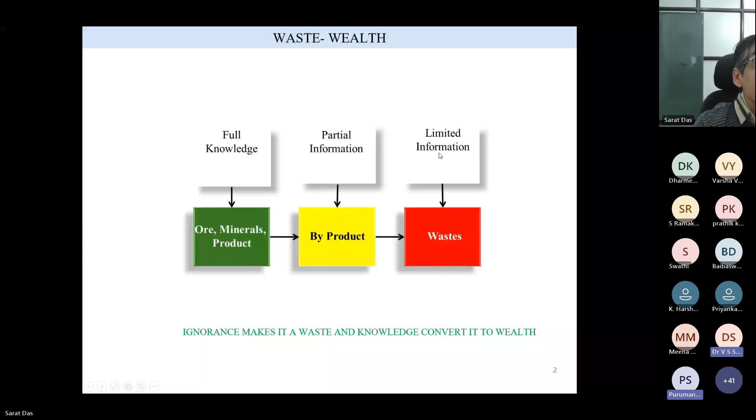Another one: sustainable development goals. Nowadays hope most of you know about these sustainable goals. There are altogether 17 sustainable goals in three domains. When I'm talking about these three domains, we are talking about economy, society, and biosphere, or in terms of people, profit, and planet.

The sustainability word was there, but initially they were thinking only about the planet - that is the environmental aspect, this will happen, that will happen and so on. Then over the years in the 80s, people added how it affects people, how it is affecting society. Later, only in the 90s, profit was added, that economic part was added.

So sustainability consists of three parts: economy, society, and environment, or people, profit, and planet. Accordingly, if you say people, it is poverty, peace, justice - all these are under society or people aspects. When talking about economy, you can see different aspects. Accordingly I've given the color coding. Finally 17 is the collaboration - all three are collaborated, which is called the 17th goal. Otherwise all 16 are related to either profit, people, or planet.

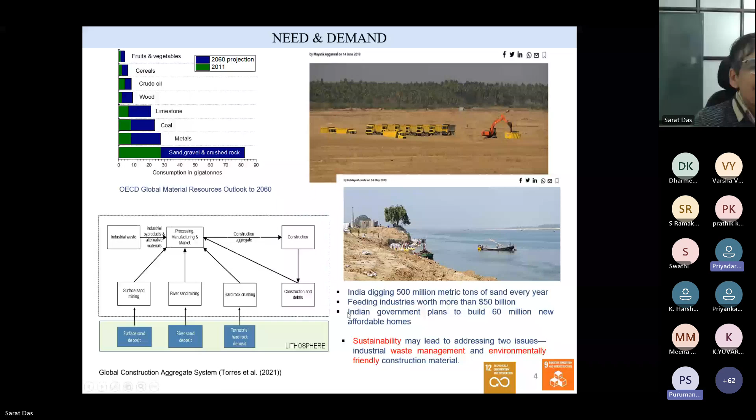Then what is the problem with this industrial waste? Why are you saying it is a waste? Because it contains some heavy metals, it may be acidic, and so on. Mostly it is the chemistry or heavy metal which is creating the problem. What are the heavy metals? Heavy metals are copper, zinc, lead, but just imagine their rate.

Chromium may be 10 times costlier than iron, and chromium is difficult, chromium will not allow. But if you can extract it and put it into the recycle for other industries, you can make batteries, you can make other things. So then my aggregate becomes clean, no heavy metal. This heavy metal is extracted and also utilized. This is what we call a circular economy. Most of you have heard about this circular economy.

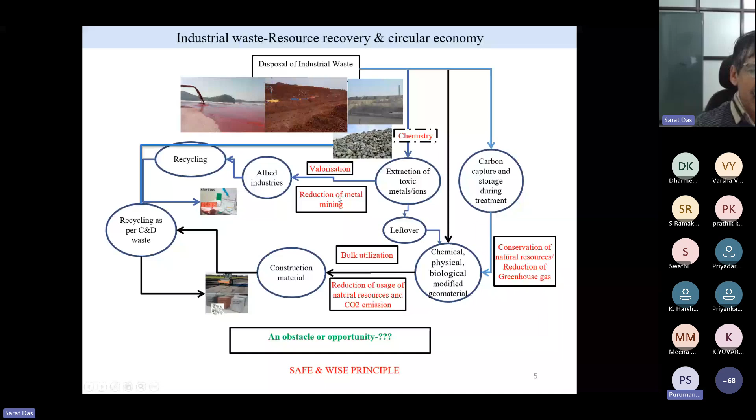So why am I saying this - for the technical sustainable part, I have to see the chemistry. Here I am talking about coal mine overburden or general soil, which has got very green, all material therein has no hazardous effect and is as good as utilized for any purpose. Whereas if you go to suppose a ferrochrome slag, you see chromite is 2 to 19%, magnesium is 5.7 to 35%.

Similarly, all these other industrial wastes have got some very different compositions. Some are very high pH, here you see 4 to 9. Our soil pH is very good, but here you see starting from 10 to 12%. All these chemical compositions have made it this way because we don't have sufficient knowledge of how to use it, so that's why they have become waste.

Whenever you feel like, you can ask me questions also. So these are the different ways we define it.

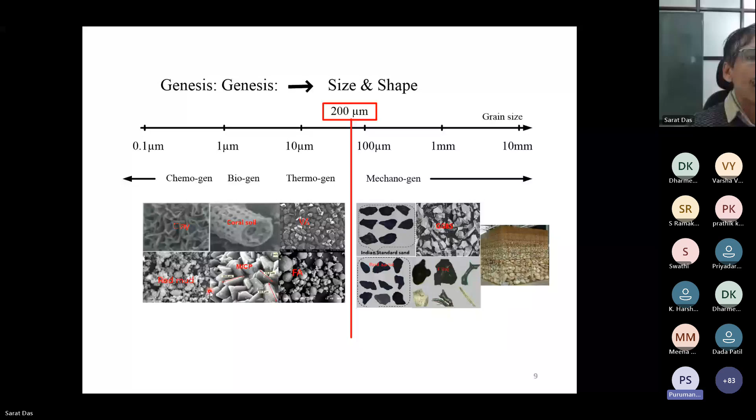So again, these are the standard sand, and this is from red mud, bauxite residue I have calculated. See how they are different though almost the same shape. In ferrochrome slag we have different varieties—some are white, some are dark, meaning alkali metals, heavy metals, and somewhere maybe stick-like things. This type of morphology needs to be studied for using it as an aggregate. That is what is important.

Now I am coming to the triple bottom line. I told you first that some materials, how we have to go for it—what is this triple bottom line? As I told you: people, profit, and planet. In the environmental part, which we calculate for sustainability, we call it life cycle assessment.

When you go for sustainability, you should understand what life cycle assessment analysis is. It has two parts. When going for life cycle analysis, I have to fix a boundary—I have to fix a goal and scope. Whether I'll go with the product, or only the process, or take only some aspect of it—that boundary has to be fixed.

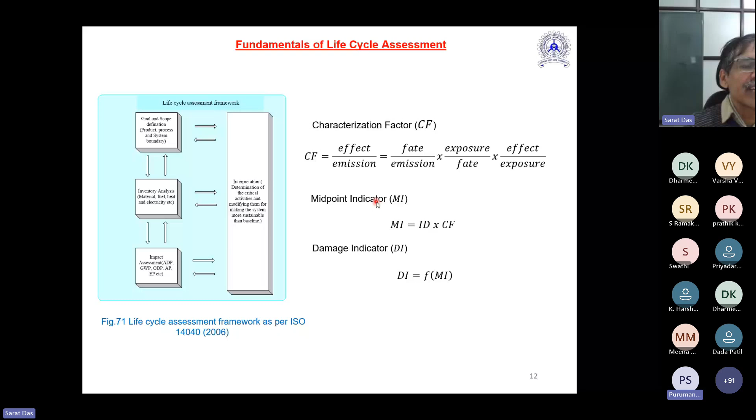We can go this way: how much is the fate, how much is the emission, divided by the exposure, how many hours you are exposed, then effect for each exposure. All these things we calculate. Finally, it is called effect by emission. This you need to calculate, and that CF we have to multiply to find out the midpoint indicator. I'll come in detail, but this is what I am saying, that you should know what is life cycle assessment.

Then there are certain uncertainties in life cycle assessment. So once you have understood what is life cycle assessment, and you have read ISO 14040, then you can think about what are the uncertainties still there in your analysis.

There could be different types of uncertainties. Like one of it is spatial variable, that you can understand from place to place, region to region. Right now, suppose what I am saying, the data if you use any software, SimaPro or OpenLCA, the data is for European countries. That I am using for Indian conditions now because I don't have that information. If I burn 1 ton of coal, how much is generated, that data is not filled or fitted in that software. So these aspects also you need to consider when you are talking about life cycle assessment.

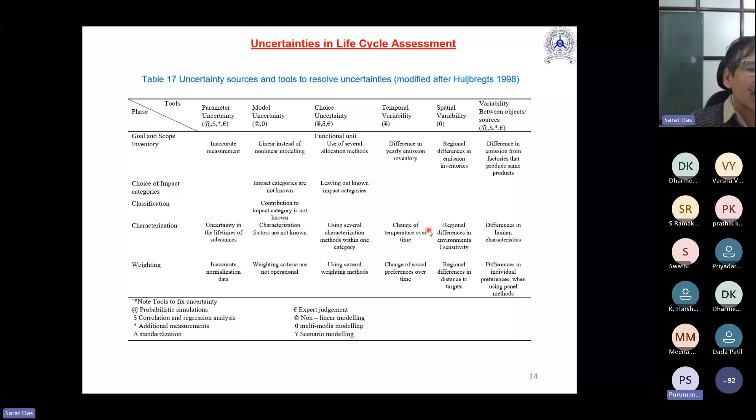Here, I think most of you are engineers. In social science, they always talk about sustainability, sustainable environment, sustainable society, and so on. But for engineering, we need a number. Without number, we don't have anything.

So as an engineer, you should always focus on number. Like when we are talking about M15, it means the strength of concrete is 15 MPa, or Fe415. So I am knowing that number is important. SBC is 150 kPa - it is not very good soil. Very good soil has no meaning. So all the time when I say it is drinking water, that means we say pH is from this to this. We need a number. They say qualitatively, but engineers should always know quantitatively. So that's why when you are talking about sustainability, you should go with proper mathematics and find out the values and give a number, then only say whether it is sustainable or which is better sustainable.

So here I am talking about, suppose I am going for sustainable analysis of sand. Here I showed you for the sand. So what is that? I have to first see what are the possible sands available. If I got only river sand, I have no alternative, there is no point in doing all this analysis. But if I have alternatives, then I have to go for it. So that's why you should have an alternative first.

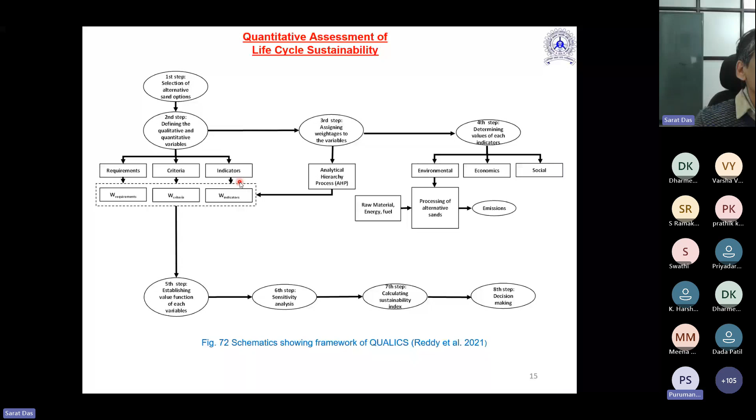Like if I go to a place and ask which they give importance to, some will say economy is our importance, some will say social is more, some will say environment is important. I will collect the data and analyze it using Saaty's method. I will be able to know, as per their statements, whether this is 40%, 30%, 30%, or 33%, 33%, 33%, and so on.

So this way you should do this analysis, which is called the analytical hierarchy process. You should learn this, which is not very difficult - one day you can learn it. Nowadays in Microsoft Excel also you can do it.

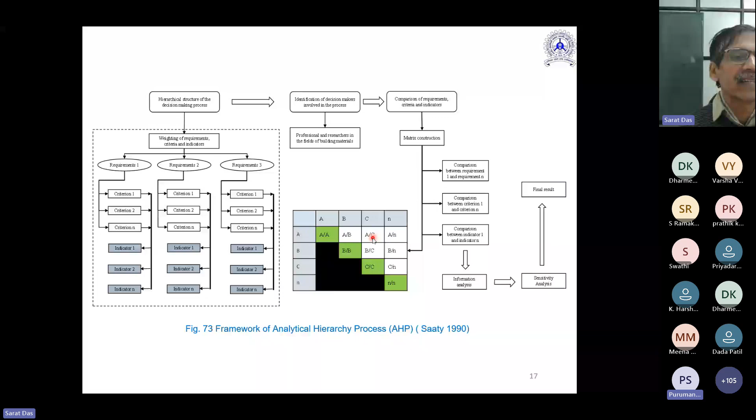Next, this same thing I have done, in particular for river sand and crushed sand, I am saying here. So when I'm talking about the analytical process, I said indicator, I got it. Now I'll go for the environment.

In environmental, for life cycle assessment, I'll go for LCA - there is some other software also for this. For economy, I'll do cost benefit analysis, and for social, this survey. These will give me a function, that means an equation, that I'll show here.

From indicator to criteria, criteria to requirement, requirement to sustainability. So indicators are environmental indicators, economic indicators, and social indicators. Each indicator I'll get a value and then a weightage, and that value into weightage, summation from i to n, will give me the indicator for the criteria level.

From the criteria level, I'll go again - I'll get the criteria, and again for each criteria I'll put this weightage to get the requirement. Again for the requirement, I'll put the weightage and go to the sustainability. So this is simple mathematics to get a value called the sustainability index.

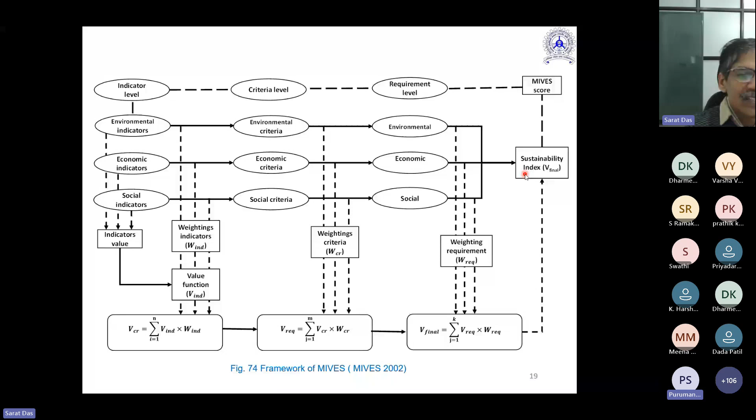So here I am showing one example, this is for river sand versus OB sand - all this analysis we have done. For the social aspect, we have taken data from around 456 people's survey. LCA we did using SIMAPRO, and cost analysis by taking quotations from companies going for crushed sand and river sand, all available in the CPWD, so you can get it. So look at the environmental aspect.

So for environmental impact, if you see OB sand and river sand, in most cases OB sand impact will be less in terms of global warming, smog, acidification and fossil fuel depletion. OB sand impact is very less because we are using whatever has already been crushed or broken from the coal mine, then I am crushing it further. So its impact is less here.

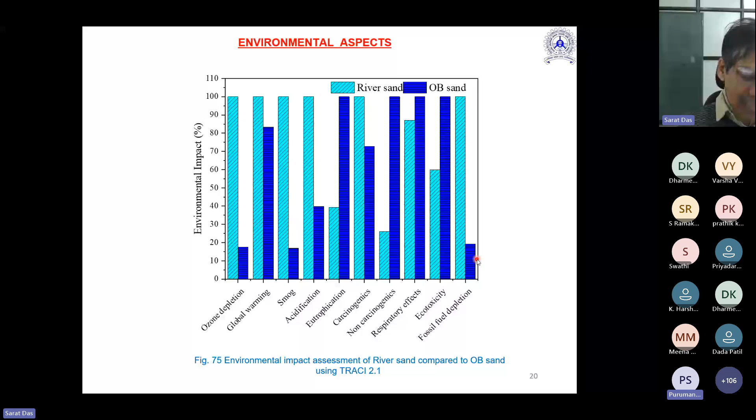And for the direct and indirect benefits, we have taken a questionnaire from the people, rating from -1, 0 to 1. Somebody said good, somebody said bad, somebody didn't say anything. So accordingly you have to give a number, because engineers need a number.

So this way we can get the environmental cost for a ton of river sand compared to OB sand. River sand cost is more compared to OB sand environmental cost, because river sand is formed over such a long period of time, and if that natural resource is not preserved or conserved, it becomes a difficult situation for the future. OB sand environmental cost is not much more.

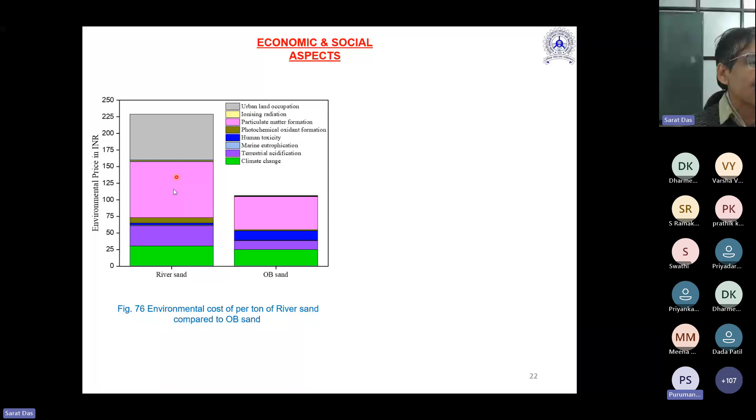And then we also have social impact. For this social impact, I'll just highlight a few points. You see, we have taken input from academics and researchers.

First, when you make the question, you have to ask the experts, is this question okay? Is it going to get the right information from the people? Because social scientists know how to get your views and they can interpret and say what you want, so we have taken help from social scientists.

Then we make a questionnaire and send it to different experts, those who are working on alternate sand. They will say yes, it is good, or they will say no, your questions are biased, you want to give preference to OB sand, which is not good, you are not considering the other aspects.

So you have to take all these views and then give the questions. And when giving the questionnaire, you have to see that people from different aspects are considered, those who are involved in this, like local public, production supply, contractors and so on, those who are working there also, and some others who have no relationship with this type of thing.

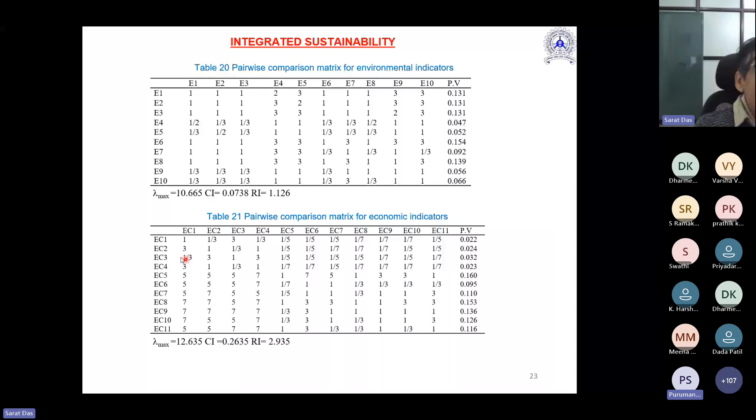And then you know how to find out the eigenvalues. So this way, for social sustainability also, we have to calculate and find out the eigenvalues, and based on this you can find out its preference value. This is for the preference value.

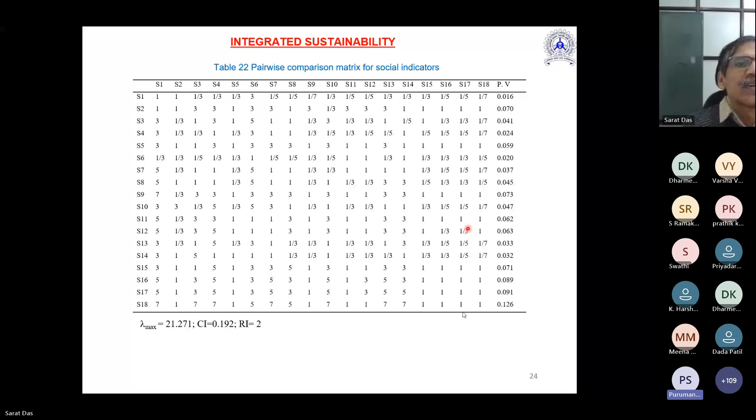Then criteria by requirement. So if I'll go for the requirement, then I'll get the sustainability index.

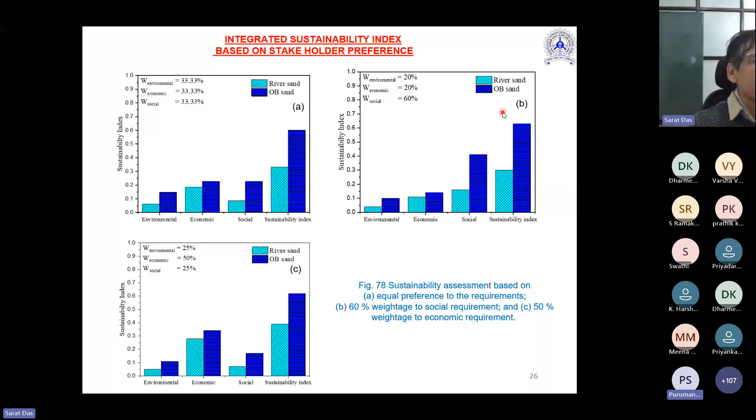This aspect I will not discuss because this will be more difficult for you. Now you don't know more about uncertainties.

Now I am coming to some technical part. There I am talking about all the OB sand, and then M sand, process sand. I saw that OB sand is better. Now I am to use it.

So when I'm talking about the construction material, OB means from the coal mine overburden. Those people also make their own road, that is called haul road. Haul road is the road used for mining. Hauling means moving the material. So if I can use that, then my transportation cost is saved. I don't have to get material from outside, and also I don't have to transport this material to outside. So that is the first requirement by default. I can say that this will be better sustainable.

So first try was that, can I use it as a haul road? Some of you might have heard about it. This is for the mining, and you know the tonnage of these trucks, sometimes it is around 400 ton to 450 ton also it can go for. In comparison, in our national highways, you can say 35 ton to 70 ton or 100 ton. So just imagine how much load it is there.

So for that, if I can use this material, being a civil engineer, first you have to study the material as a technical feasible solution. Here I have said this is all retained on 75 micron sand, that is for the sand, that is OB I am talking about. So now that I have calibrated that if I make a sand draining, how much load it is required for sample preparation, what is the density in, and so on. Forget about this one.

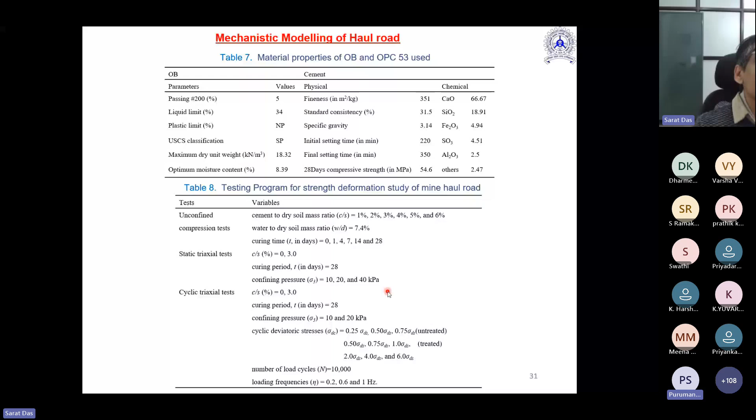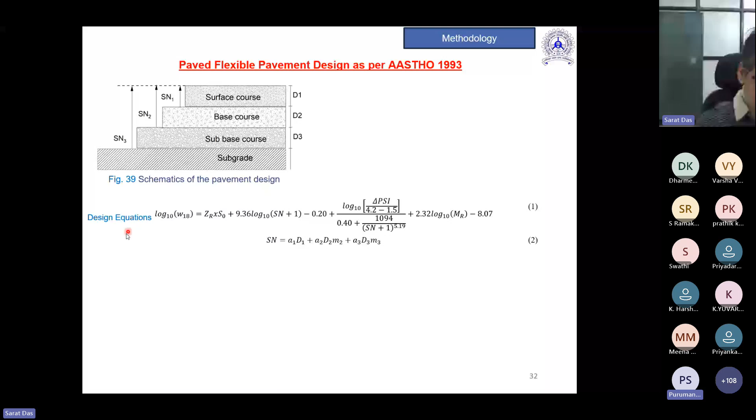So based on that, we found a compression test, static triaxial test, and cyclic triaxial test. Those who are dealing with roads might be knowing IRC 37 has that cumulative standard axle load, based on which they are calculating. So that's why the material, how much cycle it can go. So my mechanistic based model should consider these things. That is called cumulative standard axial load, might have heard about now. So for that reason, we have considered an AASHTO specification, what's the equation to find out the different layers of the sand. That also I am not going into, you can do it. And based on that, you can find out the different layers.

Once I say my OB sand is satisfying my criteria and I am able to do it, then if I go for a life cycle assessment, I have to consider natural resources and extraction. For that, you have to account for electricity usage and so on. Coal mine overburden already has extraction involved, and I have to process it.

Due to this, there will be emissions, and when you process sand, gravel or OB, for transportation also you need fuel and you generate emissions. When mixing in the batching plant, there also I need electricity, and when we store outside, transportation on site is required, emission will be there. For pavement construction also, you need machinery, there will be emission, you need fuel. So all these things form the boundary when you go for environmental impact assessment.

So you also have to specify the length of the highway, say 5 kilometers, width for 2 lanes, 2 ways, subgrade resilient modulus is 69 MPa, and cumulative single axle load is so much. For this design, I have to consider 2 different materials.

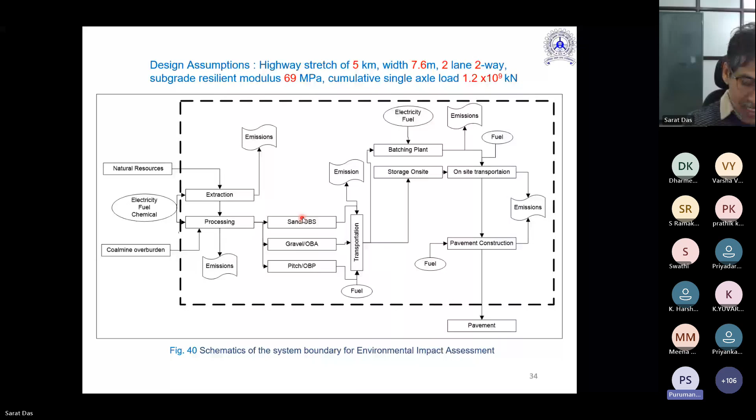When I do that, first I have to see how much material is required. Based on that, what I found is natural aggregate if I am going for sand and gravel, or another option if I am going for overburden, that is mine OB sand or OB gravel. So how much is required? Based on this, for different binder course, tack coat and so on, I got the values. And the distance, say it's the same, keep it same, and then I will compare it.

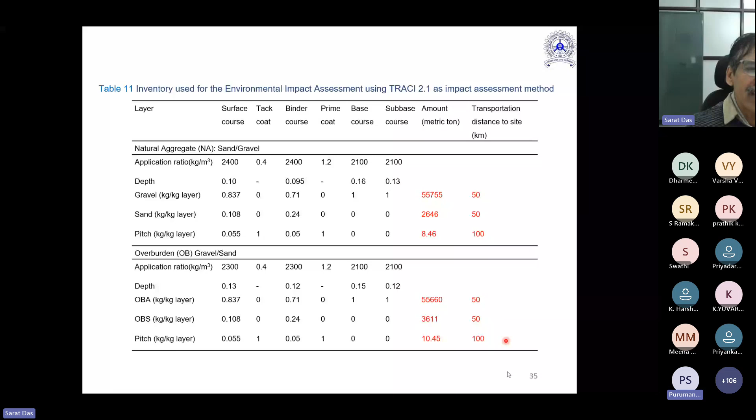Keeping all this, now I will go for the strength value. So we do the UCS value. Then with curing, what is the change in UCS value with different percentage of cement, because you need to calculate a particular optimum. When I'm talking optimum, it's not only based on strength, you have to also consider durability and sustainability if you can.

So the idea is, initially it was only the strength value that needed to be satisfied. Next is durability. Now I am considering adding sustainability also. These are the values for different days, showing how many days you can allow traffic to start. Accordingly, you can design that pavement.

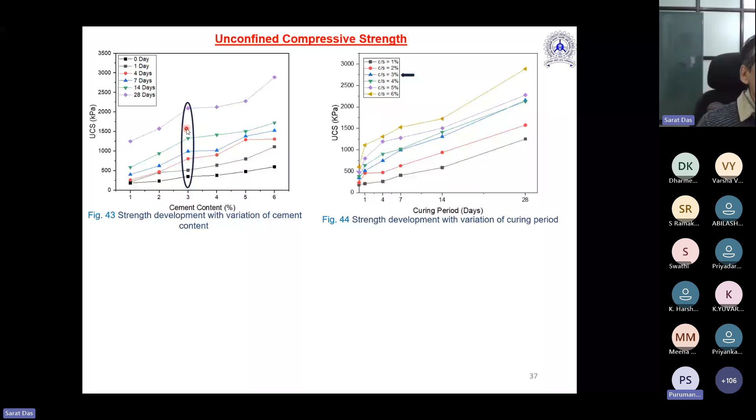These empirical models, I am not going into detail, because this model you can develop and find out, to propose what should be the strength after so many days with so much percentage of cement.

Then you need to also see the triaxial shear strength. That is also done. Accordingly, you have to find out the Young's modulus, because in the mechanistic model you need the modulus, the Poisson's ratio, and E, not only the strength value.

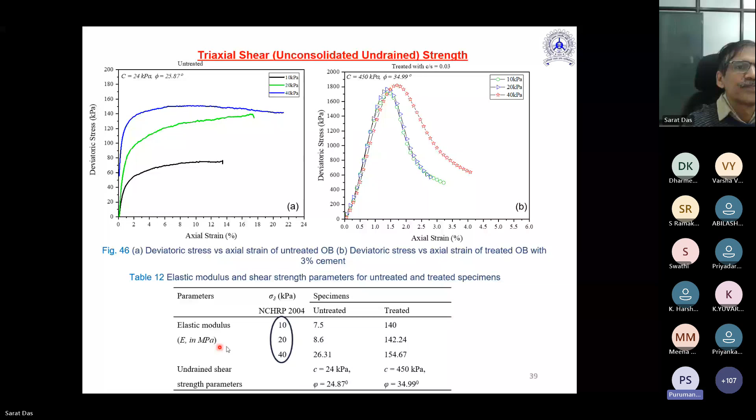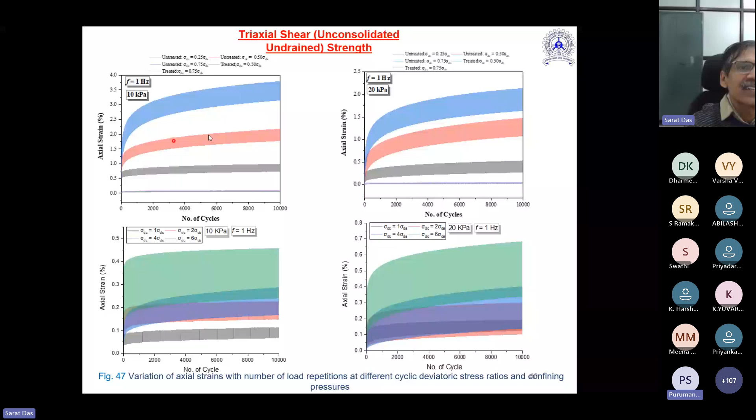So then you have to go for a cyclic triaxial test. After a certain number of cycles, what is the residual strain, that is called plastic strain. That is what basically people have done, and IIT have simplified it.

So for that strength, you can get the permanent strain, elastic strain and permanent strain, for untreated and treated samples. So strain was more initially, and after treatment, the strain has reduced. Accordingly, you need stabilization, that we found.

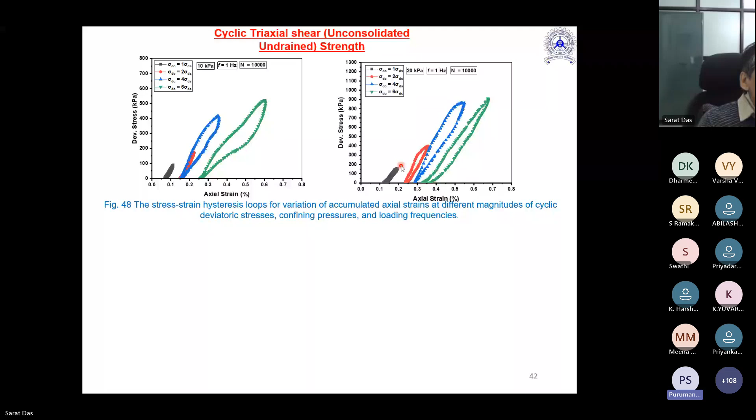This part you can do if I want to explain, because my emphasis is on sustainability. So I am not explaining in detail the stress-strain hysteresis loop, but you have to do this. That's the idea I'm telling you and showing to you.

So we have done this, and then the resilient modulus also, how it varies. You can find out at different loads and different confining stress, it will vary. So you have to be very particular about what type of road you are designing, and accordingly you have to get it.

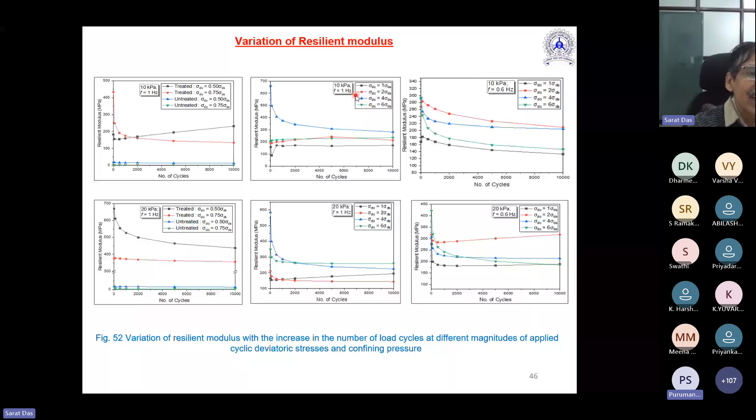So for this you have to do 12 cycles of wet-dry cycle, and you see when I am going for 5%, mostly the values are comparable to that of 28 day cycle curing. So these 5% I can consider because there is not any reduction almost. Otherwise, from 2, 3, 4% there is reduction in strength with alternate wet-dry cycle.

Then nowadays you can also use software like PLAXIS, ABAQUS, ANSYS. So you should make a three-dimensional model and check how much is the displacement of your pavement, including subgrade. You'll see subgrade, subbase, base, and surface. All this deflection you can calculate. Accordingly, you can say whether it is satisfying your requirement or not.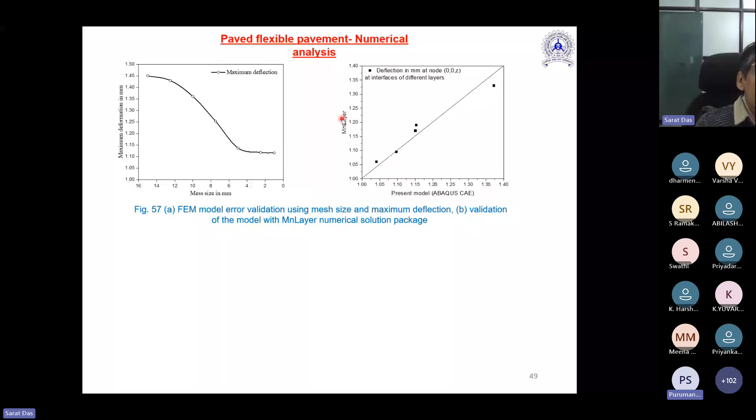Okay, this I'm not going for. Deflection is for the ABAQUS. This has been done with ABAQUS, maximum deflection. This is the requirement of FEM analysis, but this is based on the existing model, and this is based on the ABAQUS model. So this I am going for finally.

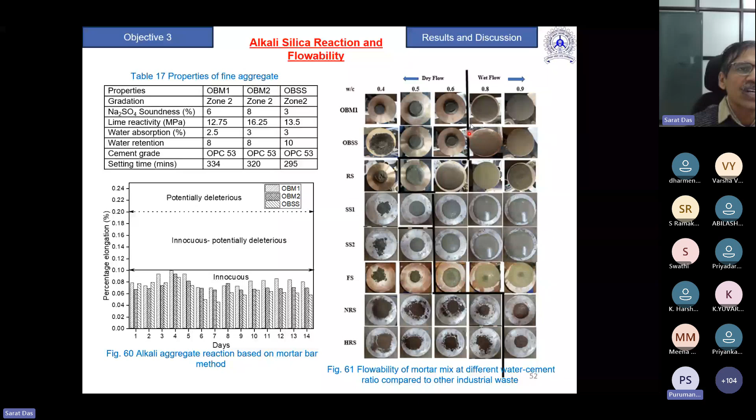So these aspects you need to study when you say you are going to use it for the mortar or concrete. So here we have done it for one mortar, done as per ASTM. You can do it also for BIS, for S-type mortar or M-type mortar. So most people say 7 days or they have got 90 days accordingly.

Compared to river sand, the value is less, 0.6% and so on, but it still can be used. The value becomes 15, 17 like M-type mortar also it is there. Another aspect is that we want to study if this sand creates any void in between, and you can do that using ultrasonic pulse velocity. And there I found that the strength increases, the value is also increasing, and 3000 is a good value.

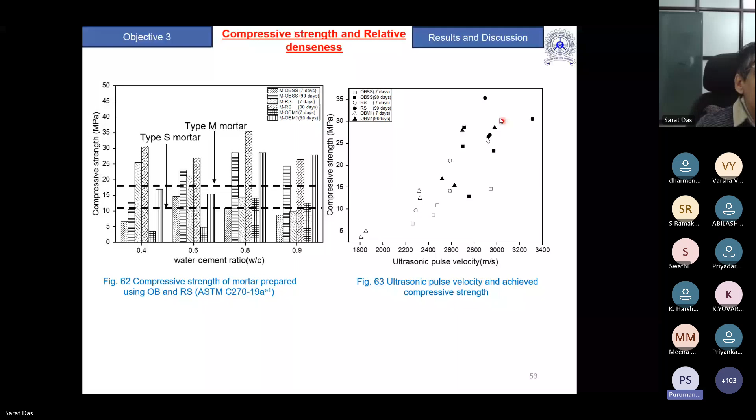Next, you need to also do durability test. So in the durability test, you can go with a slake durability test. We have done it for different material, including OB. OB has got very high value. And then also you can go with depth of carbonation, carbonation chamber test, you can do it. So because you are going for durability.

This is for the river sand, this is for OB sand, and there are two different types of OB sand. We have taken OBSS and OBM because somewhere it was looking more like a combination of clay, I mean shale and sandstone. So that's why I gave it a different name.

Similarly, we also did the RCPT test, and obviously OB sandstone sand value was less, OBSS was less, because this was a sandstone type value less compared to OBM2. So we were saying that when it is coming from sandstone type OB, it was better.

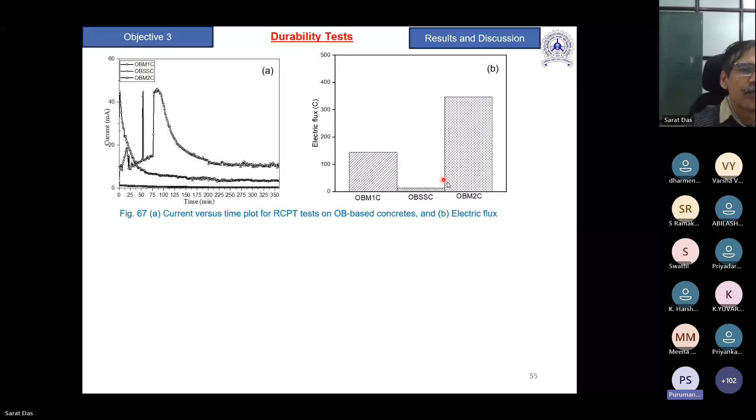So this way, I have come to show two examples for the OB. I cannot explain in detail all these methods, but if you are really interested, I can send it to Dr. Meena Murmu. You can collect it from all these publications, and I can share it with you.

Then another one, a small example today, some of you can try this. Here you see fly ash. Many people are using this fly ash in different utilizations. When I started in 90, there was no data, and only 5% was being used, no information available. Now starting from 96, you see the production increasing, and also utilization is increasing.

But in between, this is called legacy ash. Legacy ash means these are lying in the ash pond somewhere. So this ash also needs to be utilized. Now the government has started to directly use this legacy ash.

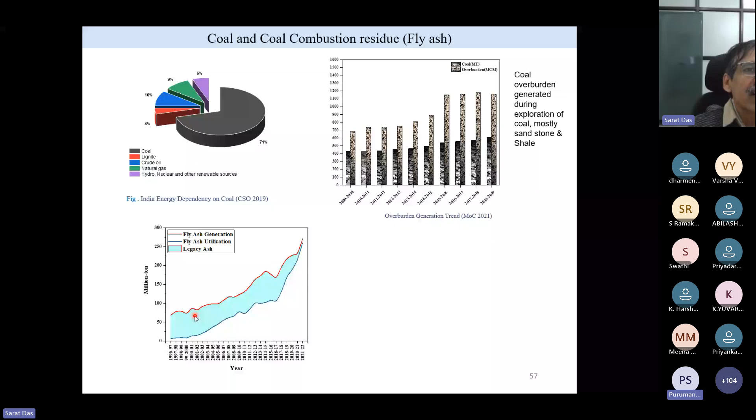Then I made a small BTech student start doing this: should we use the fresh fly ash or used legacy fly ash? If I am going for legacy fly ash, you are using so many things. If you are going for fresh fly ash, you are avoiding landfill, and directly you can take it for screening, grinding, and go for cement plants.

Whereas in this case, you have got site preparation, you have all this impoundment. Again, you have to excavate, dry, screen, grind, all these things, and then only you can put it into cement or use it anywhere else.

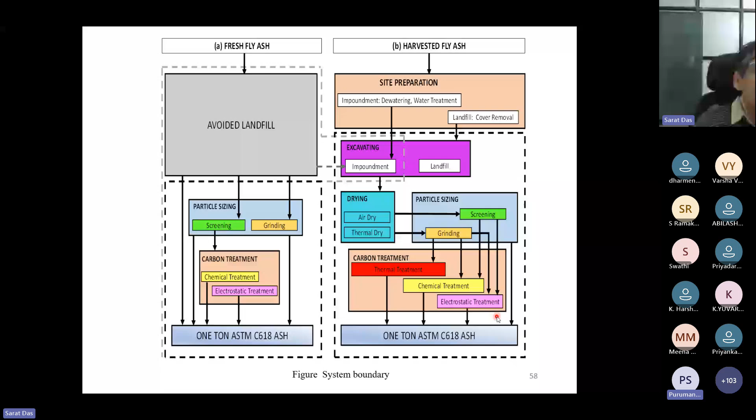People, I mean, still it is not effective, but why I wanted to show it is just to say this sustainability assessment—if you can show it and present it to the policy planner, they will appreciate it.

This is another aspect when it comes to sustainability and utilization of industrial waste, called technology readiness level. How many of you have heard about technology readiness level? Any of you? You can unmute yourself and tell me.

Hello? Hello? Hello? Yes sir, am I audible? Okay, yes sir, so I said, any of you have heard about this TRL, technology readiness level? People can respond. Some participants are there, because in this online mode I am not able to know how many are there. Any of you? Okay, yes, found sir, so many participants are there.

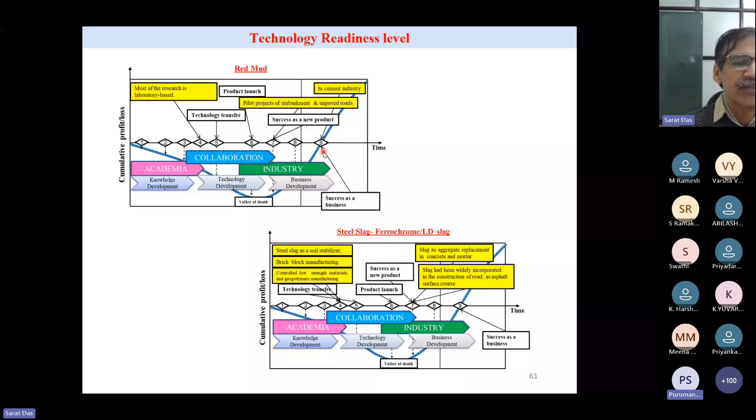So these are the red mud. Many problems we are working on with industrial waste have not come far. So far, everything follows this business model. Another thing, if you do everything and make a business, but unless it is put into the Indian Roads Congress code or IS code, it cannot be used. People will not use it. So that's why another important point is standardization. Standardization is to industry what culture is to society.

So now let me tell you about standardization with a small example. This is my thesis from 1992. I was working on fly ash. I had taken 3 or 4 fly ash samples, one was from Panki in Kanpur, Paricha, Jhansi, and others from Neyveli, Tamil Nadu. I was dealing with 3 fly ashes in 1990, and my thesis was completed in 1992. I started in 1991, so almost 1 year.

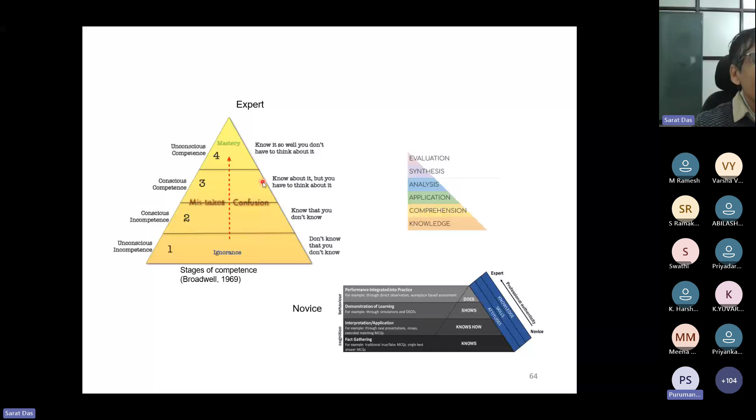So for that reason, all these things we read in class, when going to standard, it is taken care of. So there are two differences I want to point out here - one we call code, the other is standard. Code means code of practice, and the code is generally mandatory, whereas standard is not mandatory.

So in American countries, I mean British standard - there is a British standard or British code, so you have to use it very carefully. Because code means there will be penalty or restriction, but standard is a guideline. You may follow or may not follow it because it's a voluntary guideline.

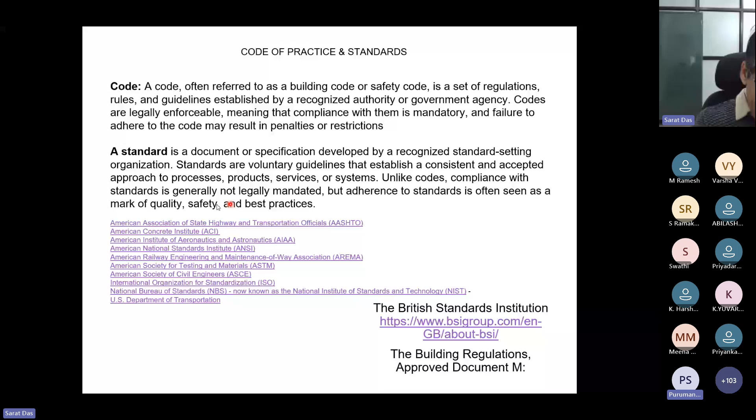But once it becomes part of a tender, that's what BIS says. By nature it is voluntary, but if it is binding, it is stipulated in a contract. So now if somebody puts that you have to use fly ash brick, then you have to use fly ash brick. That becomes binding. Like almost 12 years before, people were not using fly ash brick.

So what I did in one project was put that fly ash brick is in the schedule. That means the contractor has to use fly ash brick. So then it becomes a standard that he has to use fly ash brick in his construction.

So when you are doing research, all these things pass through TRL, and if you can develop a standard, then your research is fully utilized. That may take 10 years, but you get the satisfaction that what you have developed is being used by so many people. Fly ash brick has also been done this way. Anyway, this part I won't cover - what should be quality standard.

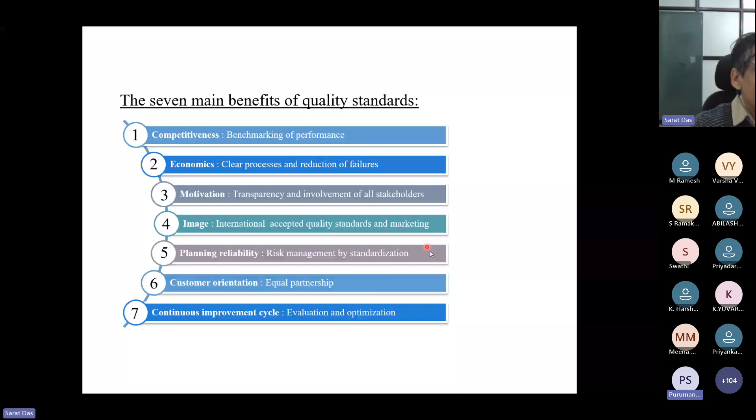Now come to sustainability. Again I am coming to what sustainability is - there is no standard because I am talking about sustainability. I told about tests, ASTM. When we talk about BIS, IS code 456 or IS 383, whatever code is available, you can use it. But for sustainability, what are the standards? There are no Indian standards.

You only have to use ISO. This is for environmental management system, and for carbon footprint. If you want to find out for any product, you have to use ISO 14064, that is what I was showing earlier. And if you are going for energy management, when using different sources of energy - renewable energy or fossil fuel energy - you have to follow these codes. So when doing sustainability aspects, you also remember there are standards.

Okay, so this part, this is what I was talking about, types of standards. There are methods of test. If you cannot develop some standard for full also, if you are doing some different test also, try to use a standard on the test also. That will also be useful. So now I am coming to the conclusion so that I can interact with you.

Some if you have got some queries. As I said, construction material - almost all the participants who are joining here, if they are civil engineers, everybody has got interest in this construction material, aggregate, whether it's structure, geotech, whatever it may be. Wherever you will use it, you will use this material.

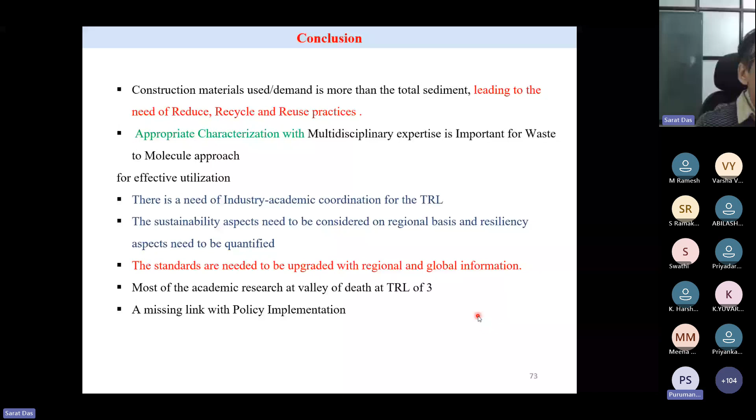So with this, I will stop it here. I will ask if you have got some queries, you can ask me.

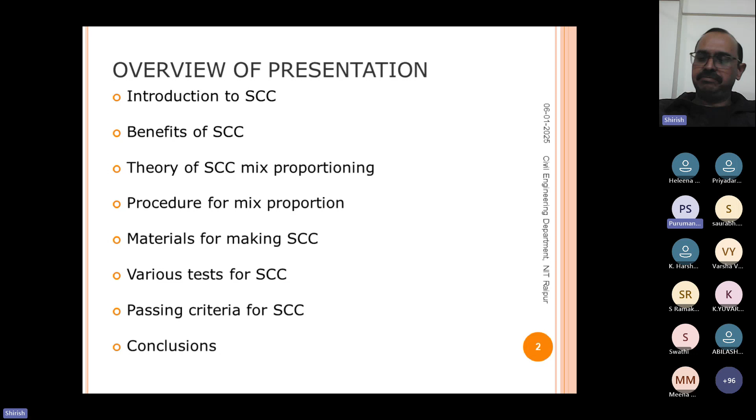So self-compacting concrete is highly flowable, non-segregating concrete that fills uniformly and completely every corner of formwork by its own weight, and encapsulates reinforcement without any vibration while maintaining homogeneity.

Now here, just to give you an idea, workability is a very difficult term to understand. Why am I saying very difficult term? Because if we define it, it is the ease with which we can compact the concrete. There is no technical term involved here. Ease for me can be different, ease for you can be different, and that is why it is very difficult to come on the same platform regarding what is ease.

And that is why gravity is the only force for compaction. Gravity is going to be the same for everybody, at every location. So when workability as a parameter is very difficult to understand, we have to come to some platform which will remain the same throughout.

That is why gravity is very important from the point of view of self-compacting concrete. Now, when we talk about gravity, two things are possible. First, if the concrete is very fluid, it may segregate or it may bleed. Now, when we are designing normal concrete, the potential of bleeding as well as segregation is far less.

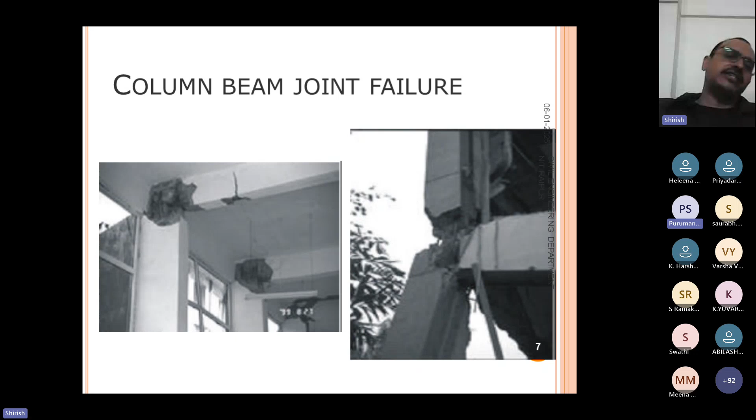So if in such a case, where reinforcement density is so high, we are not able to put the concrete well, what is going to happen? We are actually going to have a very poor bond between concrete and reinforcement, which will lead to a poor joint and finally to failure of that joint. So in any earthquake-affected structure, if you visit, mostly the damage will be at this kind of structure.

So this is an extreme case, but in normal conditions as well, we see this issue for the purpose of bends—meaning whenever reinforcement from the beam is bent and put into the column, there is a very high density or number of reinforcements at that column-beam joint, and that makes very little space available for concreting. So at such a location, it is always desirable that we use self-compacting concrete to make the bond between reinforcement and concrete good.

Areas with restricted access to placement and consolidation create difficult situations for laborers. Either the height is very high or the space between two locations is very less. Because of that, compaction of concrete becomes very, very tough. So in that case, we just have to use self-compacting concrete.

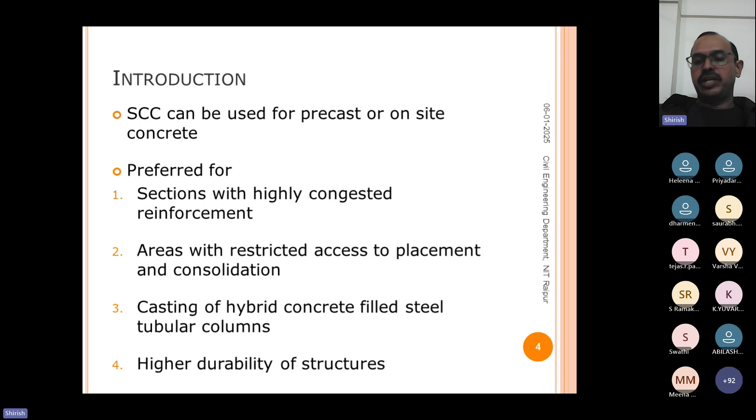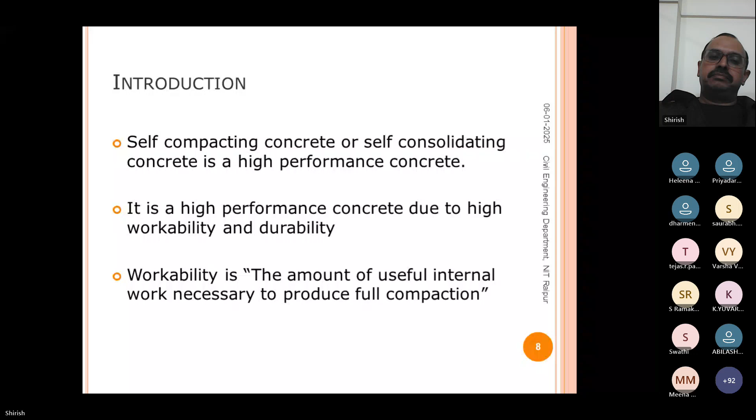So most of these introductions I have already discussed.

These are the advantages: faster construction in India. When the construction volume is very high, even sufficient labor is not available for compaction of the concrete. So in such cases, self-compacting concrete is preferred.

In a COVID-like situation wherein laborers are not at all available on the site, but the contractor has to perform the concreting, what he can do is use self-compacting concrete, which requires minimal number of labor, and concreting can be completed.

So manpower can be reduced, and there is very good surface finish. Nowadays self-compacting concretes are also produced with certain patterns.

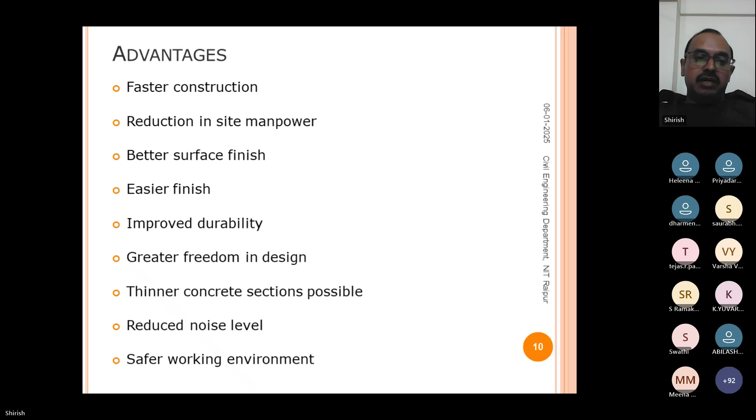Now you will say, sir, if self-compacting concrete is such a good material, why aren't we seeing it used everywhere? There are multiple reasons.

Because of higher fine material content in self-compacting concrete, it requires very good curing. If we are not able to cure it well, it is going to cause shrinkage cracks, and finally both the durability and strength will be affected.

Another issue is in today's condition, self-compacting concrete is costlier. The cost may vary according to the requirement, but cost can be as high as 20%. So the owner who is not so much focused on self-compacting concrete may not like to put 20% extra cost for producing it.

Thirdly, there is requirement of expertise in self-compacting concrete. It requires very high quality or very high shear mixers for mixing, and it also requires very good knowledge regarding concrete and concrete making materials. Just a slight mistake or slight change in anything can result into very poor self-compacting concrete, meaning bleeding and segregating concrete. That is why a lot of people who are not very familiar with the various materials don't go for self-compacting concrete. They prefer normal concrete and compact it with compactors.

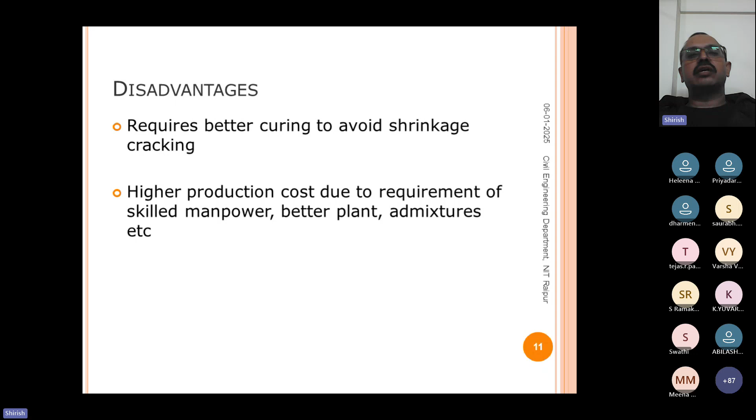So why is self-compacting concrete called high performance concrete? First is method of placing. Only gravity is the force for compacting the concrete. Because of this, the mix proportion of material is very different than normal concrete.

A lot of people have this misconception that in normal concrete, if we increase the percentage of superplasticizer or water, we will have higher workability, and higher workability of say 200 mm slump is self-compacting concrete. No, this is not right. We should not get into such things, because at the end it will result into poor concrete performance.

Conditions under which it is placed - you may remember the photograph I showed you of an earthquake zone, wherein the reinforcement is very high. I gave you the example of the Secretariat - Chhattisgarh Secretariat building is actually produced with self-compacting concrete for higher durability. A lot of people think self-compacting concrete has to be high strength concrete as well. No, we can produce M20 grade self-compacting concrete, which is very well possible.

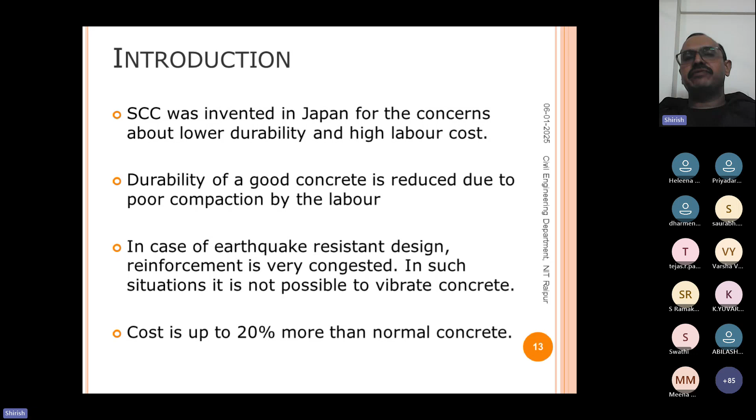In case of normal concretes, our thinking is if viscosity is more, workability is going to be less. So to make concrete more workable, we make it less viscous. Viscosity is the property of cement, water, and mortar to carry the coarse aggregate, which is a heavier and bigger material. So in normal concretes, if viscosity increases - for example, when shifting from 0.4 water cement ratio to 0.35 water cement ratio - I am actually making the cement paste more viscous because the water quantity is less.

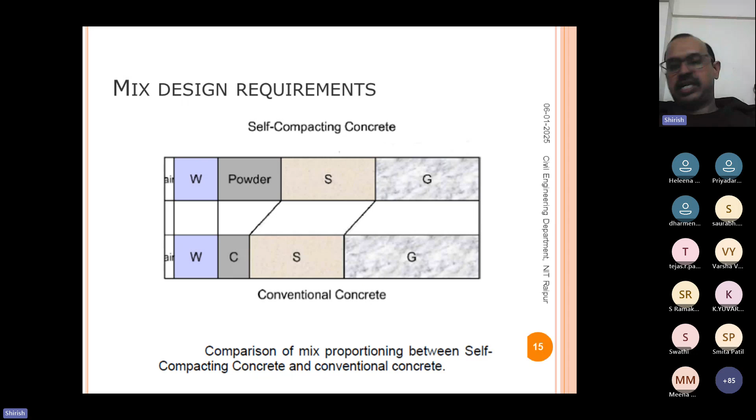So what is the difference? Because we want higher viscosity, we are putting in higher powder content and higher sand content, and because we want coarse aggregate to move along with the rest of the materials, we are reducing the quantity of gravel or coarse aggregate. That is the change in the design of self-compacting concrete. Now, there are different approaches for self-compacting concrete.

There is a simple method of dividing concrete into two phases. The first phase is fluid or paste, which is something that can flow. When this is able to flow, it will also lubricate the coarse aggregates for flowing. Phase 2 is friction material, which is coarse aggregate. We want phase 2 volume to be somewhat less than 50%, and phase 1 volume to be somewhat more than 50%. That is the difference in self-compacting concrete compared to normal concrete.

There is also an important concept called water or paste film thickness, which is important for workability. Unless the paste between the two aggregates is sufficient, it will not allow the aggregates to flow—otherwise they will remain stuck and not flow. So water film thickness has to be higher. To achieve this higher water film thickness, we need to increase the quantity of powder. That is an important aspect.

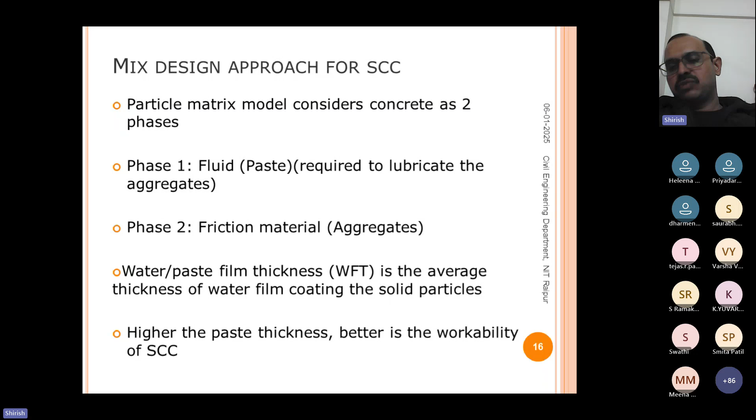Self-compacting concrete is fine grain dominant concrete. I will not get into much detail about what fine grain is and why it is important, but as I discussed, if the coarse grain—phase 2, the friction phase—increases, the concrete is not going to flow. So self-compacting concrete is divided into paste, which is water plus powder. Powder may include cement, lime powder, fly ash, slag, silica fume, or multiple such fine materials.

Water is the only liquid in concrete which can flow, so we need a sufficient quantity of it. In normal concretes, we generally restrict water to 150 liters. This totally depends on which plasticizers are available. If plasticizer or super plasticizer is not available, we may have to increase the water quantity, let us say even to 200 kg per meter cube. So that depends on which admixtures are available.

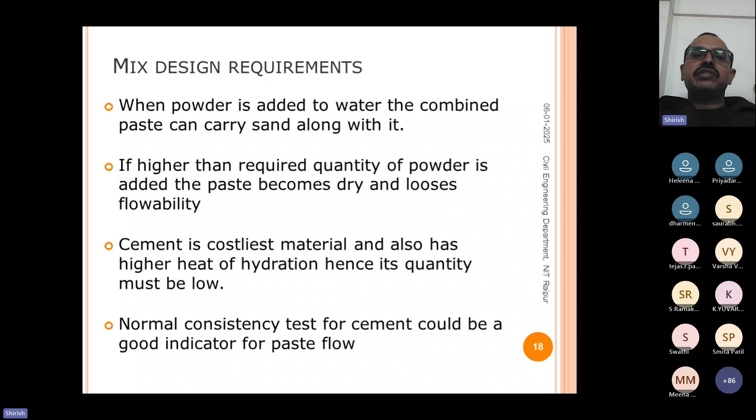Normal consistency test for cement could be a very good indicator of paste flow, so we have to understand this. Generally in normal concrete there is a set procedure given by IS 10262 which we follow to design. In case of self-compacting concrete, though there are recommendations, the important parameter is workability. So what we can do is perform the standard consistency test on the cement paste to understand whether the material can flow or not. With that, we may get some idea regarding the minimum quantity of water needed for making it self-compacting.

As I have discussed, the design requirement is lower coarse aggregate content, increased paste content, and low water-cement ratio. Low water-cement ratio may be required if we need to design high strength concrete. Then there is viscosity modifying admixture, a new type of admixture which has been invented.

What is the importance of this viscosity modifying admixture? When I try to increase the viscosity of concrete by adding higher and higher quantity of powder, what happens is viscosity increases, but at the same time the flowing ability of concrete reduces. Because the water quantity is fixed, if you increase the quantity of cementitious material or powder, it makes the cement paste or powder paste drier, and that is why the flow of concrete may not be that easy.

So what is this viscosity modifying admixture? These are very fine particles of polymer dissolved into water, and this material is added into the concrete. It does not allow the water to remain free in the concrete—these finer particles hold the water within the concrete and do not allow it to bleed. Whenever added water is higher, there is a tendency of water to bleed, so the viscosity modifying admixture, with very fine particles, will not permit the water to flow out of the concrete, restricting bleeding. When water remains within the concrete, it allows all the materials to flow together.

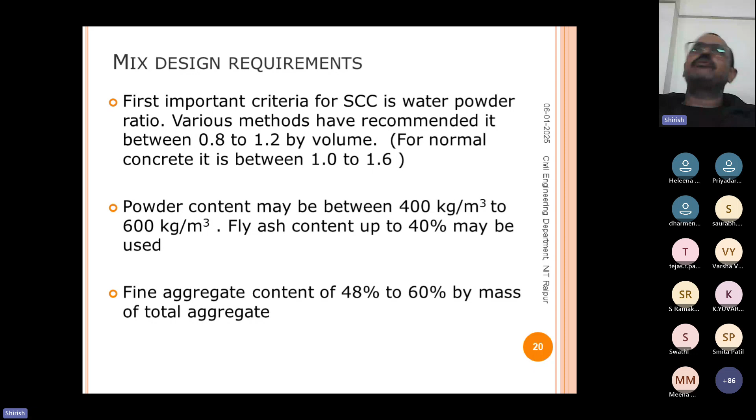Water content I have already discussed. It is going to be somewhat higher. 10, 15, 20% water reducing admixtures may not be useful; we need to have higher water reducing admixtures.

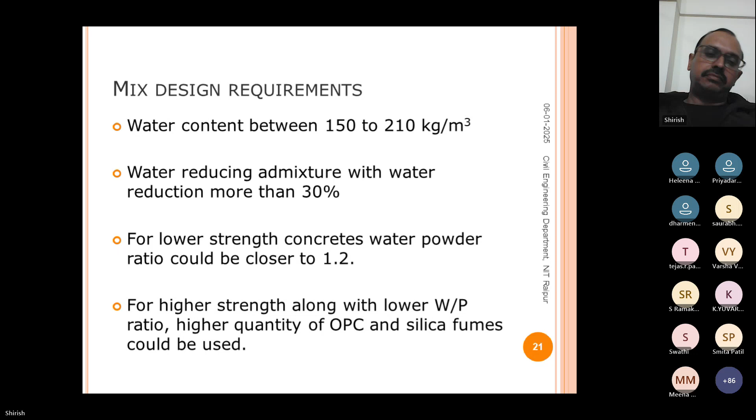Then the second part, that is coarse aggregates are carried by the mortar, which is a combination of paste and sand. Now, how is this design of self-compacting concrete different than normal? What we have to do is make paste so fluid that even after adding X quantity of sand into it, both of them can still flow.

So sometimes we may have to redesign this paste and mortar part. What actually happens is our paste is flowable, but as soon as sand is added, it becomes less flowable. That is why we may have to add a higher quantity of paste to make it flowable. So according to the flowability of mortar, we have to adjust the paste.

Mortar will have higher viscosity and lower flow compared to paste, but then it has to be minimum as per the requirement of self-compacting concrete. What are the requirements? That I will discuss shortly.

Self-compacting concrete may be called a suspension of coarse aggregates in mortar. Volume of mortar should be sufficient to carry coarse aggregate. Volume of sand is generally 50% or more of the total aggregates. That is the change. Final volume should be decided based on maximum size, grading, and density.

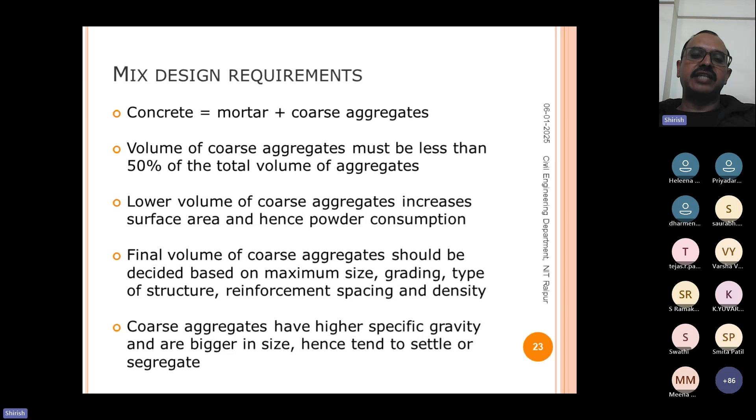Coarse aggregates have higher specific gravity and are bigger in size, hence they tend to settle or segregate. Coarse aggregates have a tendency to interlock if sufficient lubrication by mortar is not available. This interlocking is a very important aspect that we can call segregation. So we will be discussing how to check that segregation part.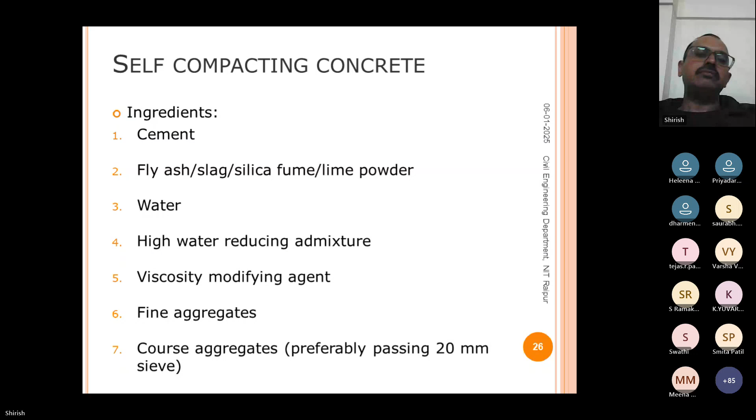These things I have already discussed, so these are the ingredients. Ingredients remain the same, but there is a different requirement for self-compacting concrete, wherein we need a higher quantity of material passing 125 micron, which is called powder. To increase the quantity of powder, we can use higher quantities of fly ash, slag, silica fume, lime powder, and so on. Water content has to be higher, and a better water reducing admixture has to be used. All these things are important.

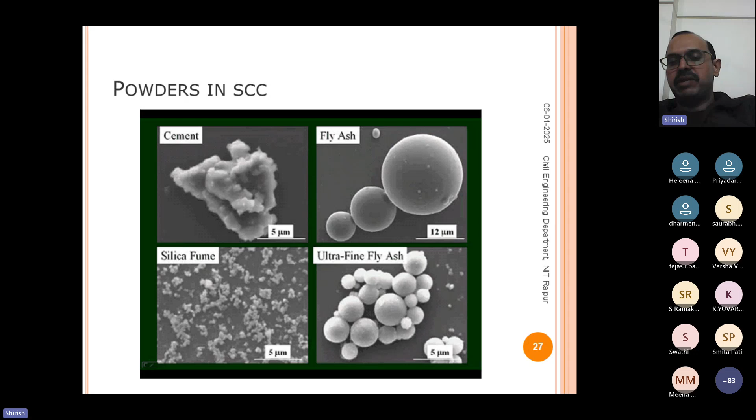How exactly does superplasticizer work? It covers the cement particles, and hence the cement particles disperse well in the concrete. When they disperse, they also allow the water to disperse well within the concrete. Considering all this, we generally get a very workable concrete with superplasticizers.

Viscosity modifying admixture I have already discussed. Whenever we are trying to produce a self-compacting concrete, we can order the chemical manufacturer that we want to produce self-compacting concrete, so you add viscosity modifying admixture as well into the superplasticizer. That type of combination is possible.

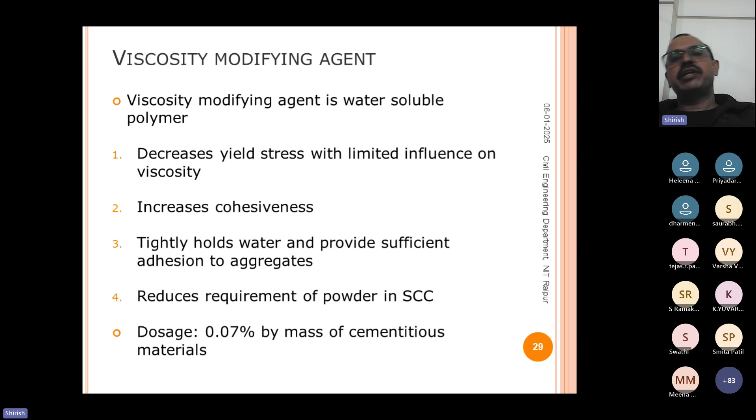As self-compacting concrete is different from normal concrete, its testing is also different. So what concrete we call self-compacting concrete needs, first, filling ability: the ability of fresh concrete to flow into and fill all spaces within the formwork under its own weight.

This filling ability is checked by a test called T50 centimeter. T stands for time — time for the slump to attain a flow of 50 centimeters or 500 mm. That is checked.

Next is passing ability through reinforcement. This concrete should be able to pass through the reinforcement present at the site — the capacity of the fresh mix to flow through confined spaces and narrow openings, such as areas of congested reinforcement, without segregation. It should pass through the reinforcement and not segregate, meaning it should allow coarse aggregate as well as mortar to be present everywhere.

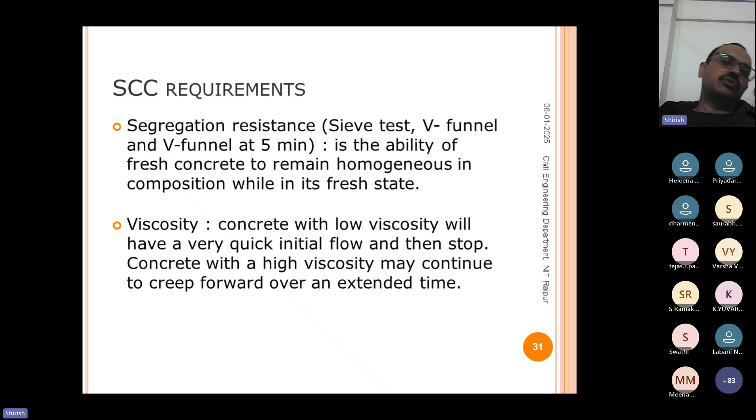The last property needed is viscosity. Concrete with low viscosity will have a very quick initial flow and then it will stop. For example, with water plus aggregate, the flow of concrete initially will be very fast — water will pass through the edges while coarse aggregate will not. That is why viscosity is very important.

These are the tests we have to perform, and these are the limits given by the code. In the case of self-compacting concrete, visual observation is also very important, because visually you can understand whether the concrete is good or bad.

Then there is T50 centimeter slump flow test. Flow should take less than 8 seconds to reach the 500 mm mark. We have to measure the diameter of concrete at different locations, and that diameter should be 500 mm, with the time taken to reach it less than 8 seconds. Lower the time, the better.

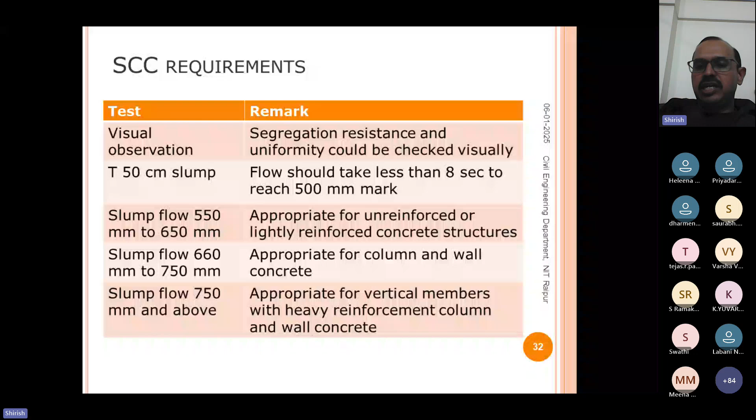Then there is another test called slump flow. In slump flow, we don't check the time in which it reaches 500, 600, or 700 mm. Instead, we just check how much the diameter of flow of concrete will be. Higher the diameter, the better. According to that, 3 categories have been made, shown here, which are useful for different types of construction conditions.

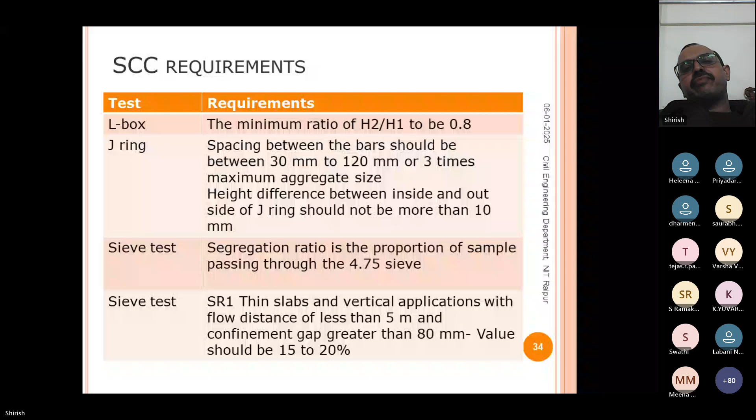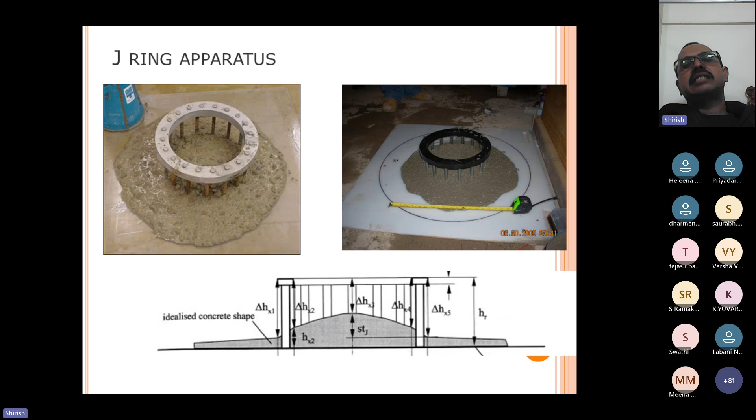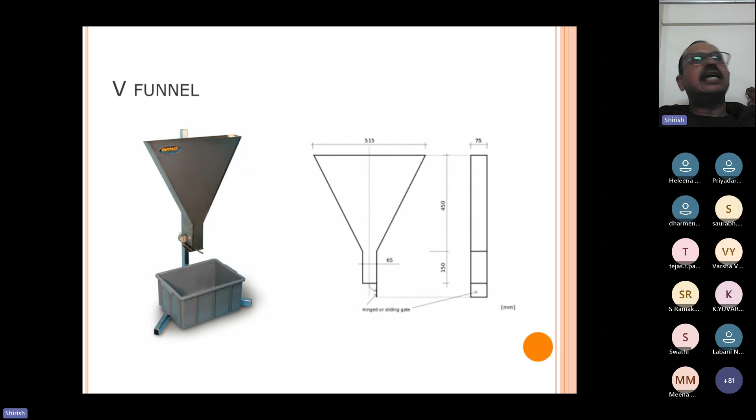If such a thing is happening, we call the concrete as segregating concrete, and then we may have to reduce the quantity of fine aggregate, or increase the quantity of paste.

So this is all about self-compacting concrete. Self-compacting concrete is a very important material for making durable constructions, hence it must be encouraged in all important constructions. Higher initial cost can be easily compensated by lower labor cost and higher durability. So even if we are spending more in terms of initial cost, we will get long-term benefits, and hence we should use self-compacting concrete.

Now, as self-compacting concrete is a high performance concrete, we need to have a very strict quality control for the self-compacting concrete. Otherwise, we are going to have a poor self-compacting concrete. So we must follow the details which are available in the code. Luckily, our present 10262 code has provided us good guidelines for producing the self-compacting concrete.

Just to improve the workability and to improve the viscosity, we need to use fly ash, GGBS, and such similar materials which are useful in enhancing the workability of concrete. We have to use higher volume of fine aggregate and lower volume of coarse aggregate for producing self-compacting concrete. The concrete produced should have filling ability, passing ability, segregation resistance, and viscosity. That should be checked very frequently.

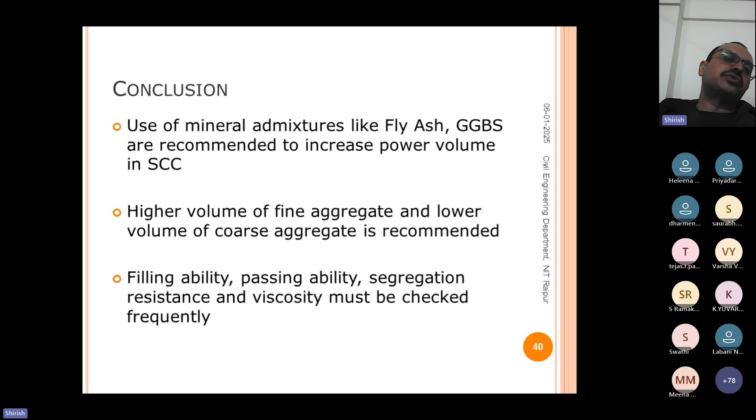And if we fail to do that, we may have a poor concrete at the end of the day. So that is why when we are talking about self-compacting concrete, we should very much use the best quality control practices to produce the concrete.